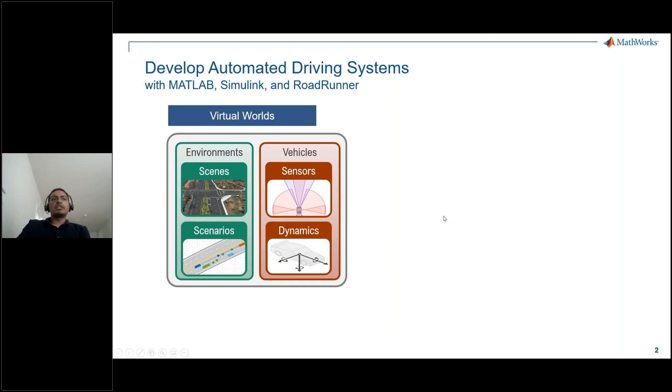The second trend driving MathWorks investments is the need for multidisciplinary skills. Developing an automated driving application requires a variety of skills, from planning and controls to perception disciplines like detection, localization, tracking, and sensor fusion. MathWorks provides dedicated toolboxes to help you learn and apply these disciplines, along with metrics and analysis capabilities you can use throughout your development process.

The third trend driving our investments is the need for software. Our investments here are focused on strengthening our platform tools to enable you to design, deploy, and test the embedded software. To illustrate how these different investments come together, let's take a look at some of the examples that we ship with each release.

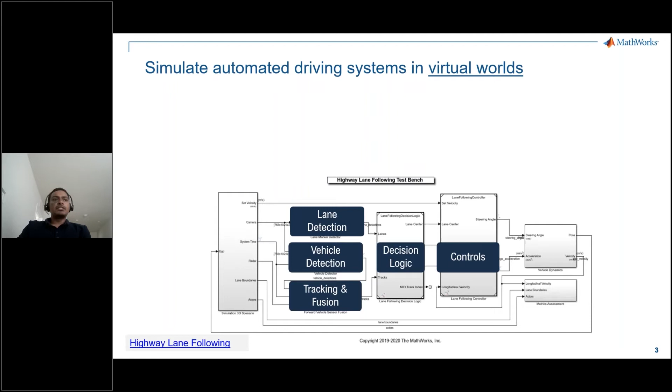Let's say you're developing a highway lane following application. You would have components for perception, tracking, decision, and controls. In order to design and test these systems, you will likely want a virtual environment that allows you to generate camera images, radar detections, and also model vehicle dynamics. After that, you would want to assess overall system performance.

This is an example that we have been shipping for a few releases. Each release we incrementally improve upon it. This example helps you learn how to architect and simulate at the system level.

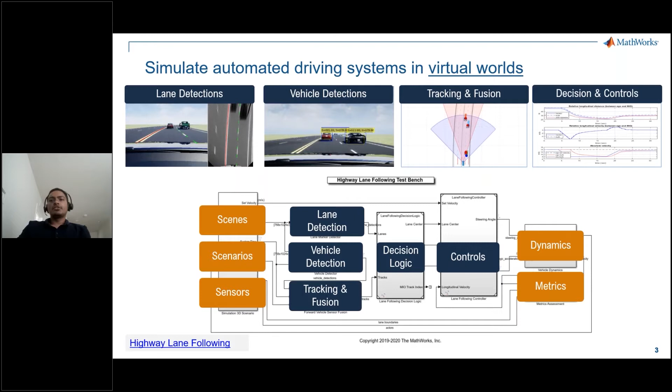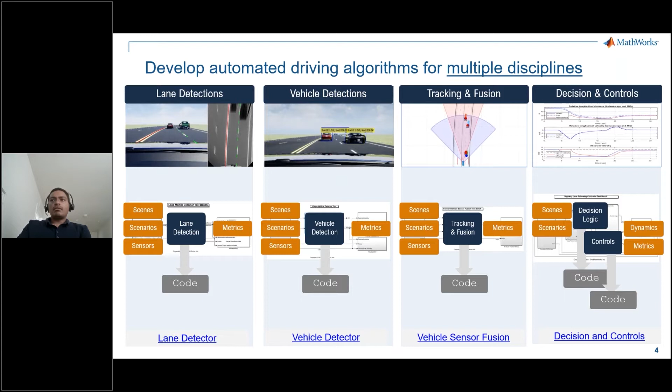Once you have code for this algorithm, whether you get the code from MathWorks or you coded it yourself, you can bring that code back into the system level simulation and gain confidence that the code is functionally correct at the system level. In addition to running interactive simulations, MathWorks provides tools that help you manage tests and report results. You can automate the testing at your desktop, on a cluster, or on the cloud.

You can also reproduce all the examples shown in this presentation, and we have customers that extend these examples or workflows further in their development process. You can bring generated code back into the system level simulation and gain confidence that the code is functionally correct at the system level. In addition to running interactive simulations, MathWorks provides tools that help you manage tests and report results, and you can automate the testing at your desktop.

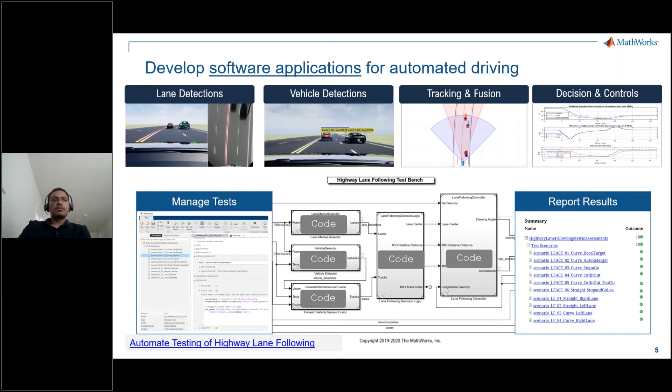One area where we see a lot of interest is in creating scenario variations. Once users learn how to create virtual scenarios, they start creating variations and use simulations to help them identify new scenarios of interest to add to their regression tests.

We also work with our customers to help them identify new scenarios from their recorded data. We help them extract information from their CAN log or directly from camera or LiDAR data. Extracting information directly from camera or LiDAR data often begins with a labeling process. From the recorded data and labeled data, we help them identify scenarios of interest and help them recreate simulations of the recorded data. They can then integrate those into their design and testing workflows as well.

The examples that I talked about demonstrate some ways that customers develop automated driving applications with tools from MathWorks.

Now that you have an understanding of how these tools can come together, we'll take a closer look at some of the newest features and examples that align with the areas of investment: virtual worlds, multidisciplinary skills, and software applications.

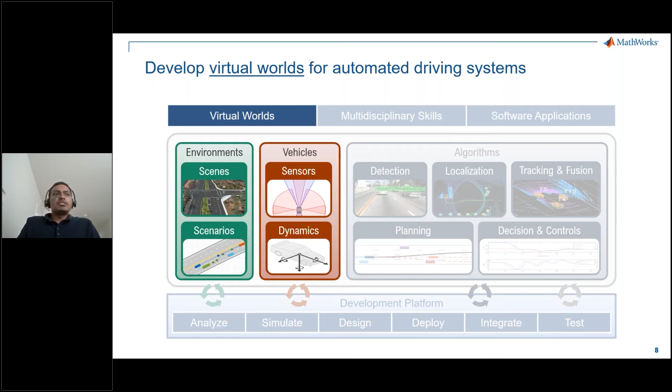Moving on to the next section here, I will cover MathWorks investments in the virtual world area. In this virtual world section, we'll cover scenes, scenarios, and different sensor modeling capabilities.

Last year, MathWorks introduced a tool called RoadRunner. RoadRunner is an editor for designing 3D static road networks that can be used in automated driving simulations. RoadRunner can import a variety of formats.

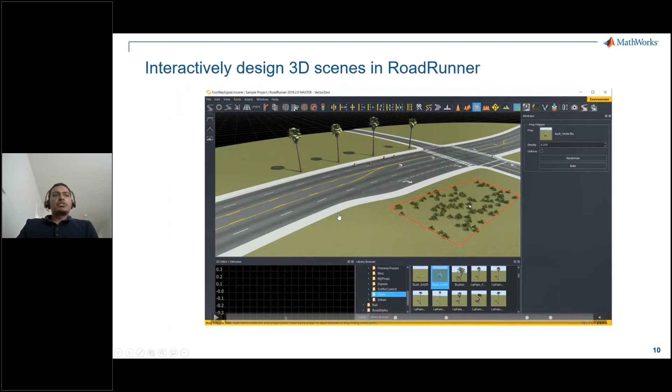If you haven't seen RoadRunner before, this will present some portions of the tool to show how it looks. As you can see in the video here, it's easy to edit roads and update the road lane characteristics.

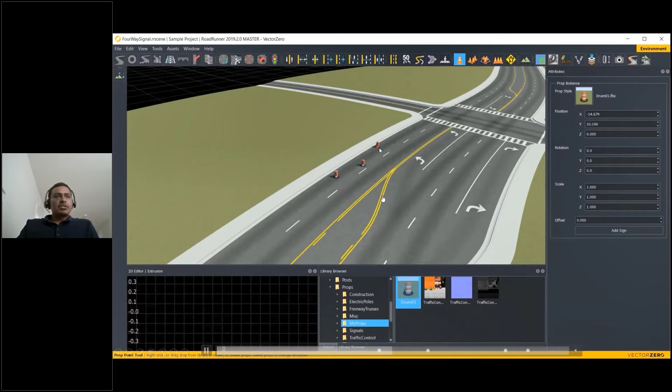You can also add roadside objects, like traffic drums, and you can add road signs. You can also add traffic lights, and simulate intersections as well. You can program the intersections accordingly.

Here I'm going to show the workflow of exporting the Roadrunner scene to Carla. First, to export it to Carla, you begin with a scene in Roadrunner, and then, as you see, I made a few changes here to edit the road.

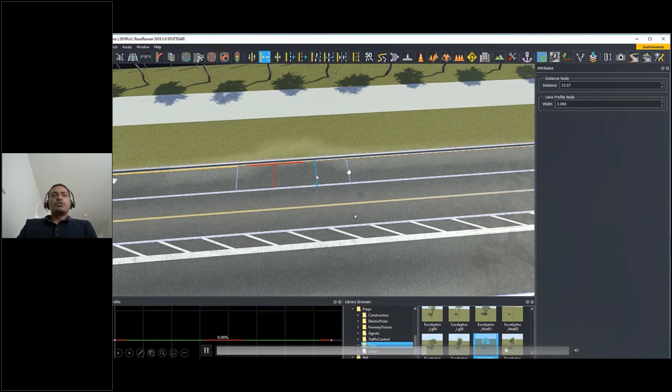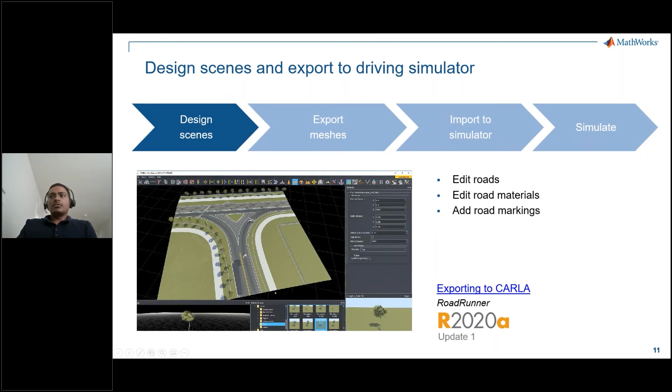I'm changing some road materials, and then also adding some road markings here. After that, you can export the mesh from Roadrunner and import it into Carla to simulate the same scene. Here you're seeing the exporting options. We are exporting into FBX format, and once you have exported, you can import that into Carla.

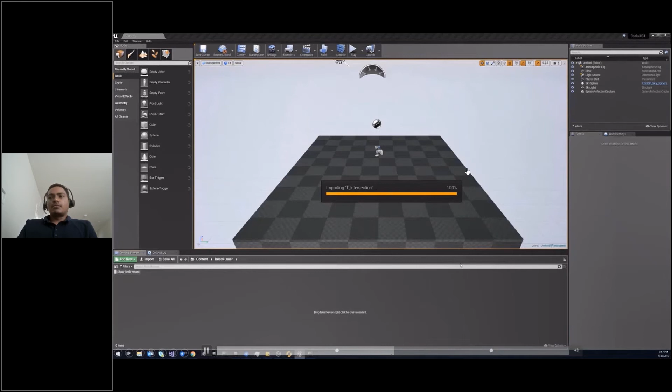As you can see, it's a very quick process to import the mesh into Carla, and once you import it into Carla, you can simulate the scene in Carla, as shown here.

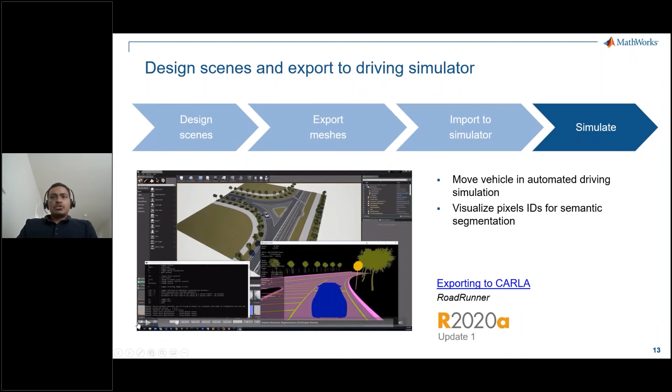Once you import the scene into the Carla simulator, if needed, you can visualize it for semantic segmentation. After that, you can also add required actors as shown here, and then simulate the scene as well as the actors in Carla.

In 20A, we provided an addition to Roadrunner called Roadrunner Asset Library, which is a set of 3D models and assets for scenes you want to create with Roadrunner. The library provides hundreds of assets, including road and highway signs, traffic signals, road surface markings, trees, barriers, and road damage textures such as cracks and oil spills.

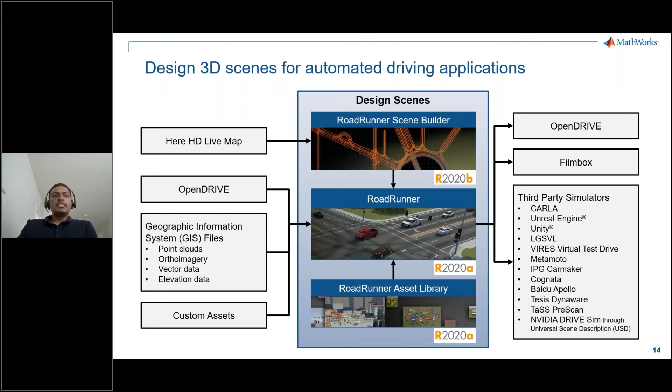The second addition in 20B is a scene builder, which imports and automatically synthesizes 3D road models from HERE HD Live Map road data. You can visualize and edit the road models in Roadrunner, adding trees, streets, road signs, and other elements to create 3D scenes and then export them to the simulator of your choice.

Here I wanted to highlight some of the new capabilities of the tool. The first is the cross-section tool, which enables you to edit the shape of the road at specified cross-sections to manipulate banking, crowning, and curb shapes. The next is the superelevation tool, which adjusts the slope and banking angle for the full width of the road.

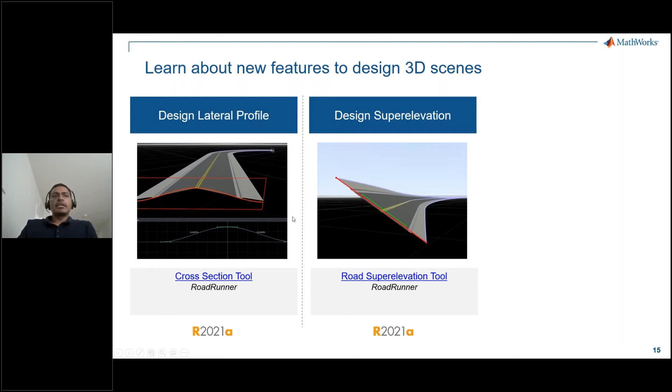While we had the ability to read HERE HD Live Map in 20B, in 21A we added import of additional information such as poles, barriers, and signs in the editing canvas.

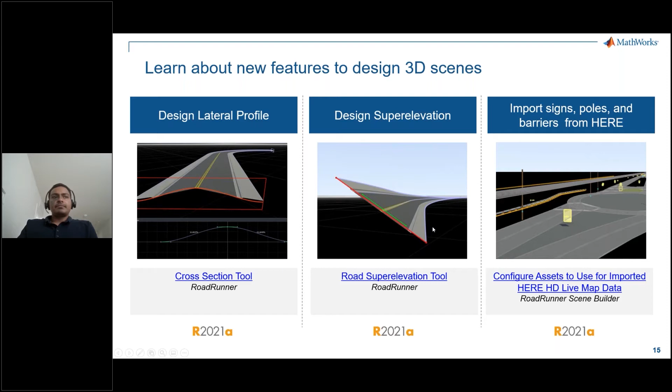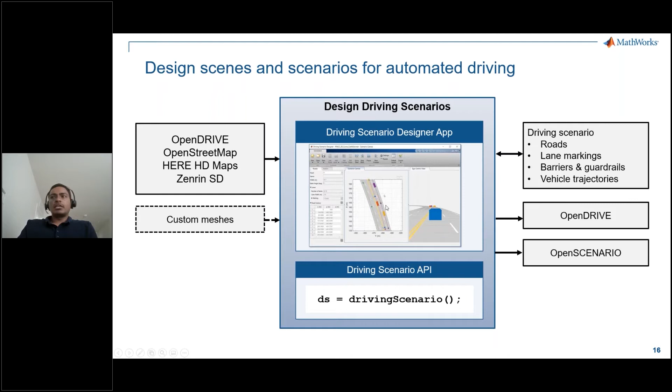RoadRunner was the newest addition to our portfolio, but since 2017, as part of the Automated Driving Toolbox, we provided tools to help you interactively and programmatically design scenes and scenarios in a cuboid environment. The image you're seeing is the cuboid environment.

I'll go into a bit more detail here. With a few instructions, you can create a scene - these are very quick steps you can do for the scenario. After that, you can add actors as well as the trajectory programmatically. Doing this programmatically gives you better control of creating and controlling the scene. Once you do that, you can simulate the scene very quickly.

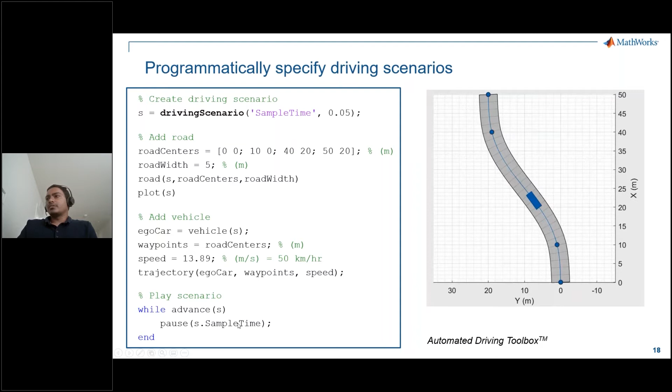As you can see, these lines of code are simulating the scene. Some of the newest features of this cuboid environment I'd like to highlight are adding guardrails or barriers, and you can also import OpenStreetMaps into this cuboid environment scenario designer. You can also import Zenrin maps, which are popular in Japan.

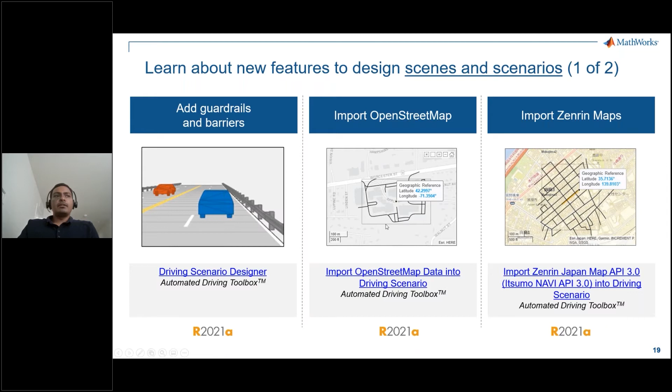In addition, you can now specify reverse motion and also export to OpenDRIVE, OpenSCENARIO from the ASAM standards. MathWorks is part of the ASAM organization, and we are investing in OpenDRIVE and OpenSCENARIO standards. We currently have some capabilities, and we continue to invest more in these areas.

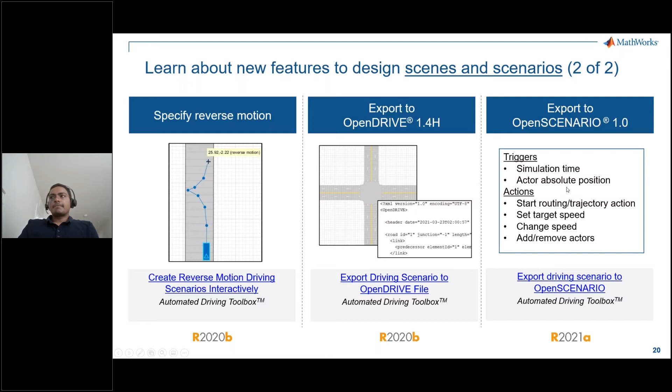So far, I talked about authoring scenes using RoadRunner, and also how the driving scenario designer in ADT can be used to create scenes in a cuboid world. The simulation with the cuboid world is very useful if you're developing controls, planning, tracking, and fusion. Developing detection and localization often requires a 3D environment. We integrate with Unreal Engine to support these workflows as well.

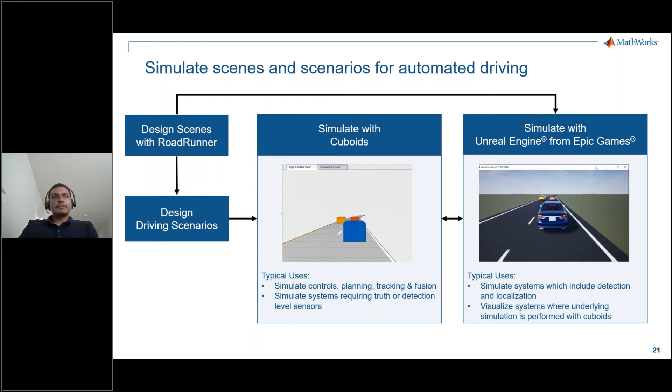Some enhancements to developing with Unreal Engine include making it easier to integrate custom vehicle meshes - you can import your own vehicle mesh and work with it. You can also control the vehicle headlights and tail lights, and control the weather and sun placement in these simulations. In the next slides, I'll show some of these in more detail.

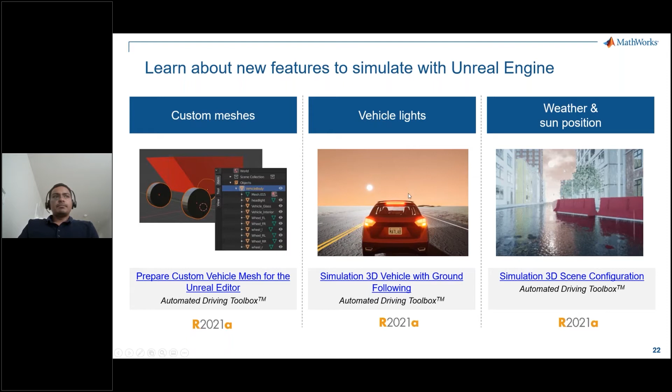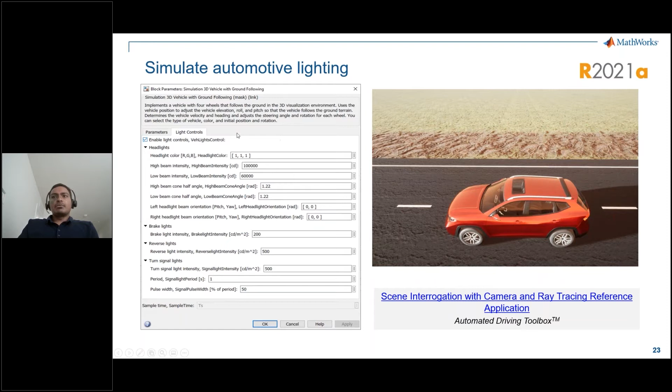Here I'm going into a bit more detail on how you can control the lighting. You can see there are a lot of parameters supported, which you can tune to simulate lighting control of the vehicle. You're able to control different lights of the vehicle with specific timing control and do simulation with those lights.

This reminds me of a scenario I used to be involved in - for some applications we used to develop, we'd go to different places to look for rain and move people there to test. Whereas with simulation, you can do all that at your desk.

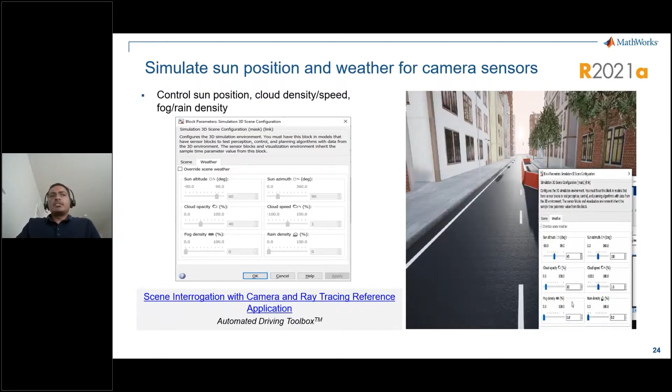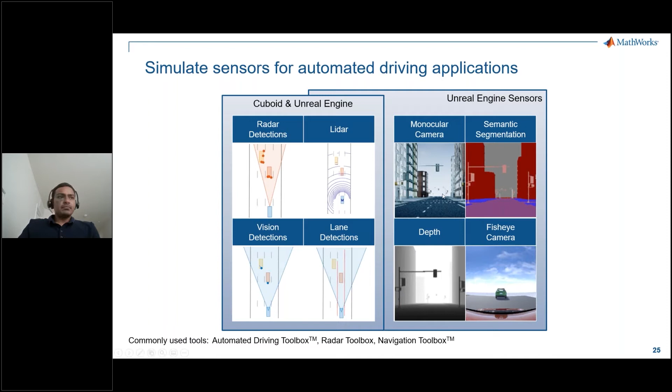And some of the sensors like radar track signals and IQ signals work in only cuboid world. The sensors that I talked about so far are to help detect objects, but there are also other sensors that detect the position, such as wheel encoder, GPS, IMU, and INS. These can be used in both worlds since they detect position.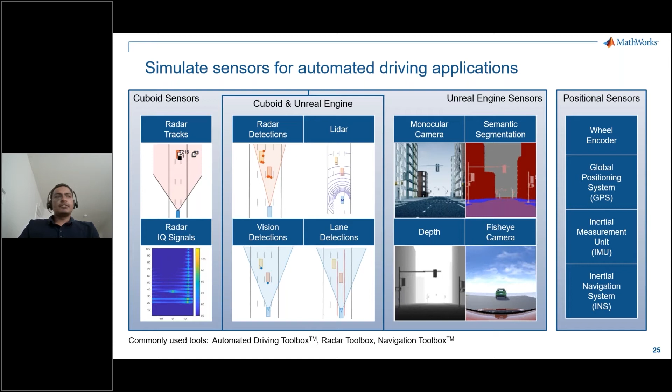Radar is one of the sensors we have been investing in, and in 21a, we have a new toolbox called Radar Toolbox. The philosophy of investments in radar is guided by the different fidelities that are needed at different stages of development. For example, at the application level, engineers want to work with detections, clusters, and tracks. But if engineers were working on radar sensors, they want to look at the raw IQ signals. So we have environments and an easy way to switch between these two types of outputs here.

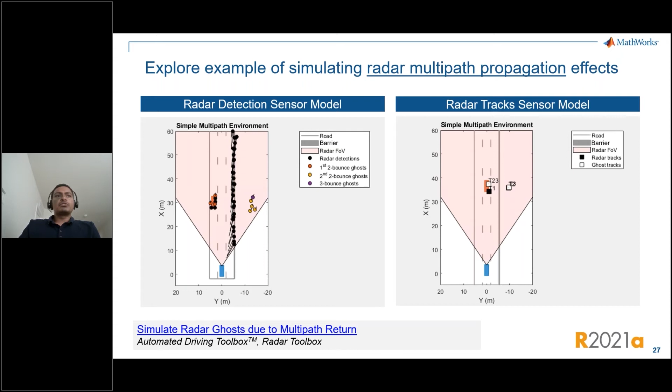To illustrate multipath propagation effects, we can explore a shipping example which demonstrates ghost detections at both the detection level and at the track level. Statistical radar models are used to generate detections or tracks in single and multi-bounce simulations. You can also generate time domain IQ signals using the radar transceiver System object.

We see here that the ghost target appears at a larger range than the real target, and eventually they both converge to the real target. As you can see here, there are ghost targets and then the real target converging together and becoming a real target.

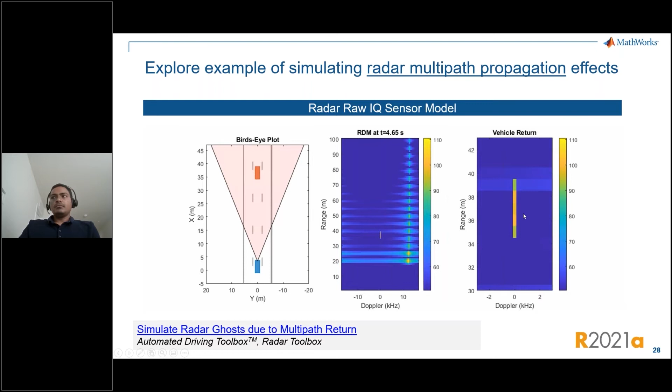Then there are libraries available. Sorry, I think I skipped one slide here.

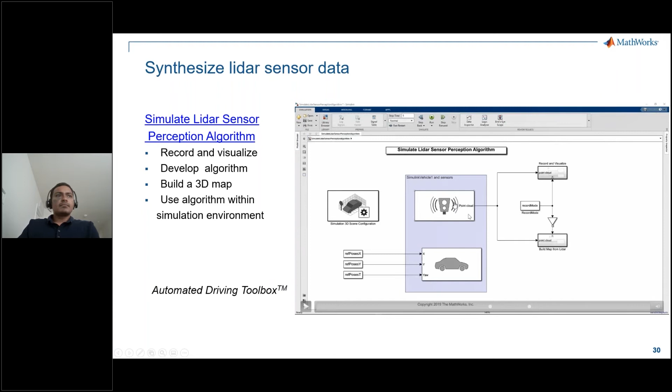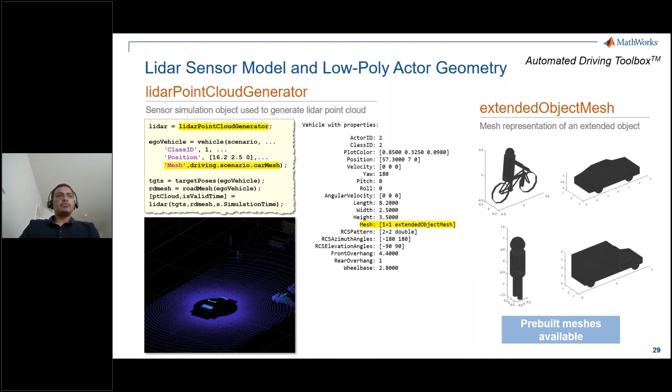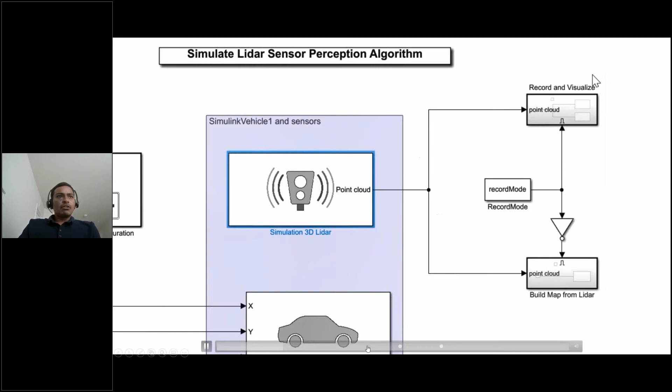There are libraries available to generate point clouds from a driving scenario. Using extended object meshes, you can simulate LiDAR sensor data for custom meshes, and there are pre-built meshes available also. The example here shows how to record synthetic LiDAR sensor data using a 3D simulation environment. Using that, you can develop a perception algorithm using the recorded data, and after that, you can use the algorithm within the simulation environment.

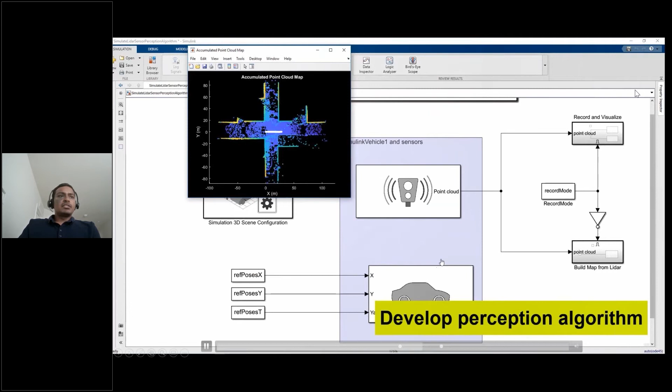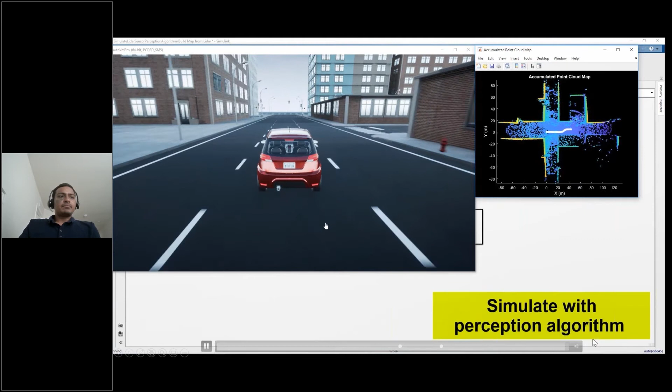After that, the model records and visualizes the synthetic LiDAR data. You can use a pcplayer object to visualize the streaming point clouds. Once the model has completed simulation, you can save the data to the workspace as a point cloud object. Next, you can use recorded data to develop a perception algorithm to build a 3D map of the environment. After that, we can test the perception algorithm using stress-tested scenarios. This approach can be used to increase coverage for scenarios that are difficult to reproduce in the real world.

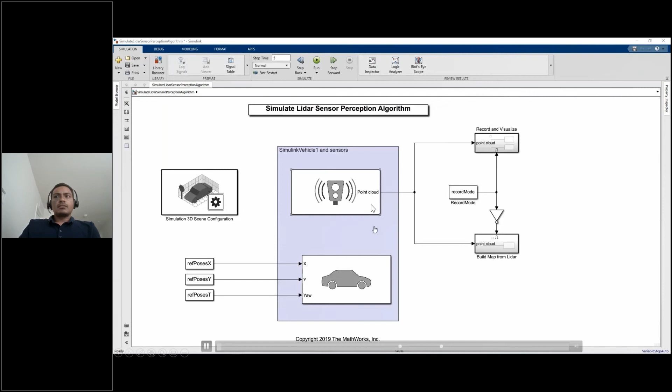There is some problem with clicking here.

The camera sensor is based on the ideal pinhole camera model with a lens added to represent a full camera model, including lens distortion. For the camera sensor, you can specify the camera's mounting position and orientation. You have an option to choose between different mounting locations. You can also define sensor parameters such as camera intrinsics based on a pinhole camera model. And also the model includes radial and tangential lens distortion. And you can estimate camera intrinsics, extrinsics, and lens distortion parameters using the Camera Calibrator app from Computer Vision Toolbox.

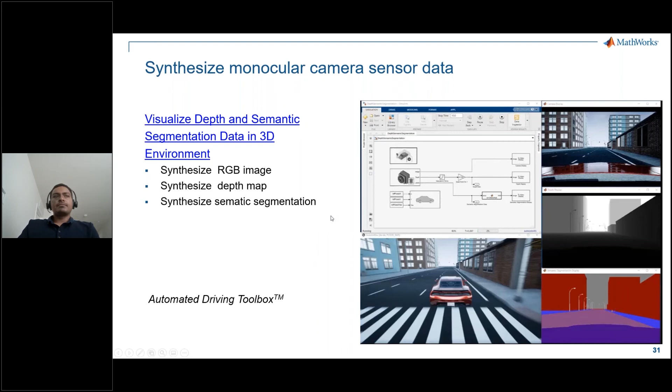We also have vehicle dynamics models for 2-axle, 3-axle vehicles, and also trailers. If this is an area of interest to you, we can have a follow-up session with experts in this area.

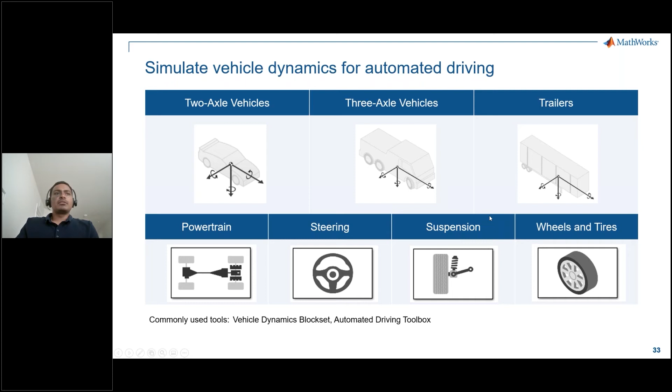So far, we have laid the foundation of MathWorks solutions to develop virtual worlds, but what we see in the field is also how customers extend these workflows to develop new scenarios. This happens in two ways. The first method is to create new scenarios from recorded data, where customers use the recorded data, label it, extract the information, and then create scenarios out of all that analysis. In the second method, they create new scenarios programmatically, introducing variations into the existing scenarios. In both areas, MathWorks continues to invest to give our customers more possibilities to identify new scenarios to test.

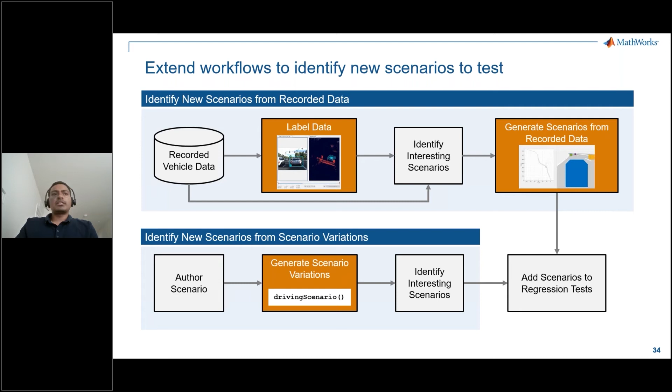In the previous slides, I talked about simulating different sensors. Now let's take a look at labeling sensor data. We have a Ground Truth Labeler app, which allows you to bring in camera, LiDAR, and custom data. Its primary interface is a graphical interactive tool that allows you to specify regions of interest, such as cuboids, rectangles, polygons, and also sub-labels and so on.

One of the big powers of this tool is to register automation algorithms. While we provide some algorithms to get you started, we often support customers to use algorithms they have developed or use state-of-the-art algorithms that are available publicly. If you have your own algorithm, you can import that algorithm and then label the scene the way you are expecting to.

And here I would like to highlight some more recent enhancements for labeling. This is allowing labeling polygon regions of interest, and then also you can label projected cuboids and be able to synchronize. And also you can automate the labeling process with both camera and LiDAR. Basically, we are seeing very often customers wanted to use both camera and LiDAR data for ground truth labeling.

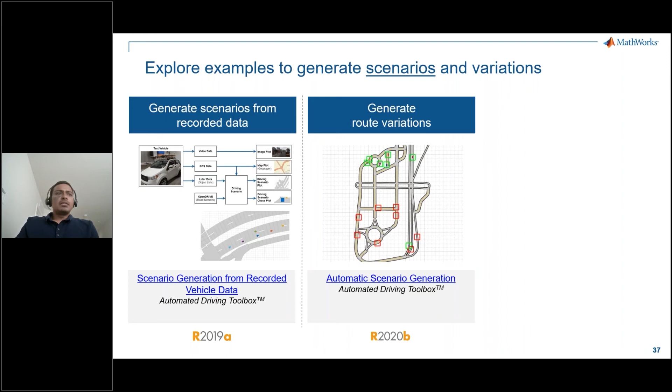Once we have the information, we often see customers programmatically varying the scenarios to generate variations out of those scenarios. Here, one example I would like to call upon is scenario generation from recorded data in 19a, which uses detection lists and GPS data to recreate the scenario in simulation. In 20b, we added an example for generating route variations.

And we have an example to show how Simulink can be used to program multiple vehicle behaviors existing in the same simulation. Here you can see there are different vehicle behaviors. You can configure your intelligent vehicle like velocity keeping, lane following, and lane change.

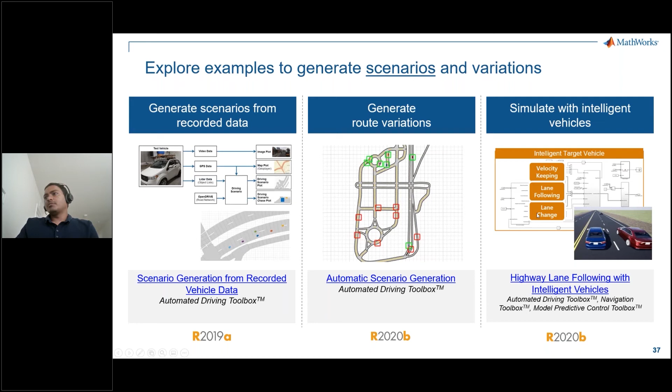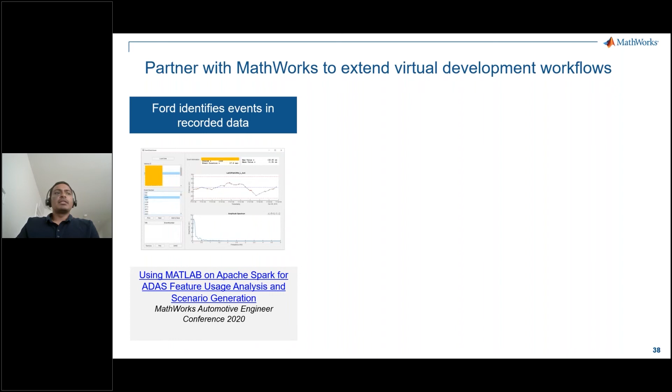So here we set up the multiple different tools and areas of investment in the areas of virtual worlds. This is also an area where we encourage our customers to reach out to us and work with us for their specific use cases. For example, we worked with Ford to identify important events from their logs of data. We also helped BMW in order to label vehicles and extract information from their images.

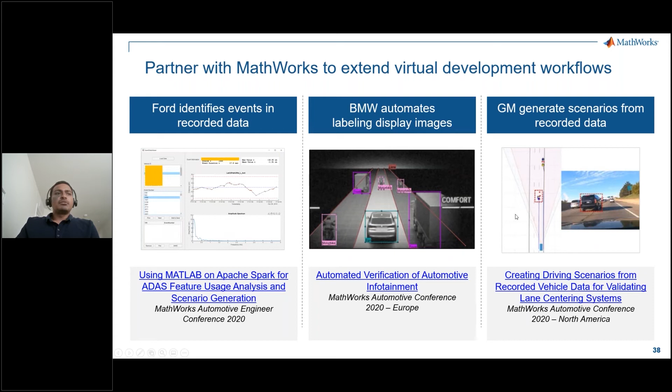And one more thing I would like to highlight is working with GM, we facilitated recreating scenarios from recorded data and bringing that into simulation in order to test their lane centering algorithms. So this is the end of the section of virtual worlds.

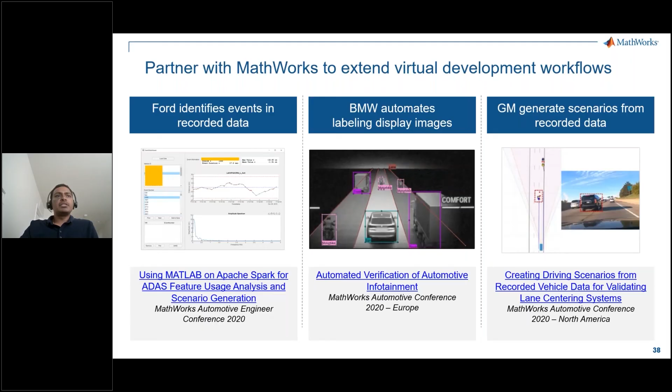Moving on here, in the previous section, I talked about how the virtual world is going to help engineers develop automated driving applications. When we look at all these virtual worlds, we realize the need for a lot of algorithms underneath the applications to address the challenges or to develop the needed features. Basically, it requires a lot of skills across multiple disciplines in order to design such algorithms, both from functional correctness as well as the deployment standpoint.

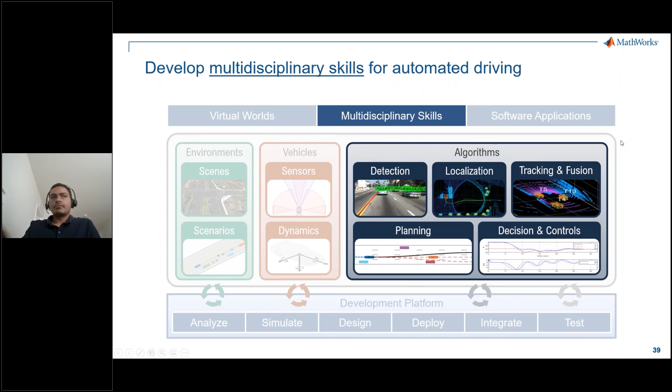In this section, I'm going to walk through some of these disciplines and tools to design these types of algorithms that MathWorks provides to help engineers learn and apply them. Here, first, I'm going to focus on planning and controls as we have lengthy investments in these. Along the lines of planning and controls, we see customers adopting our tools for various levels of automation, autonomy, and automated driving, ranging from ADAS features like adaptive cruise control, emergency braking, to higher level functions like lane change and parking.

Here, I wanted to highlight some of the areas we are actively investing in. One of them is the highway lane change application under planning and controls. This is an example that shipped a couple of releases back, and we continue to improve it. Some of the things we are improving are the visualization, such that you can see what's happening in the simulation and possible trajectories the vehicles may choose. The example shown here also focuses on the underlying architecture of how to build such kind of application.

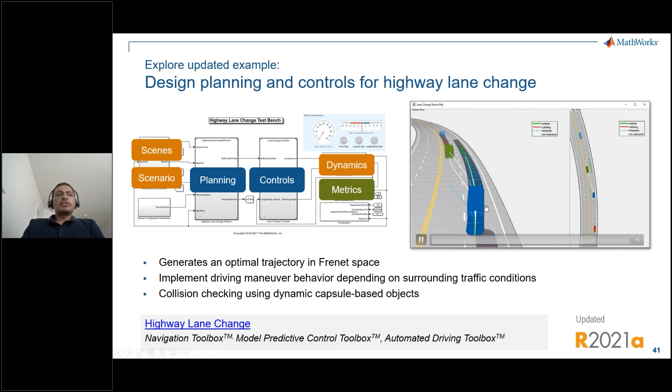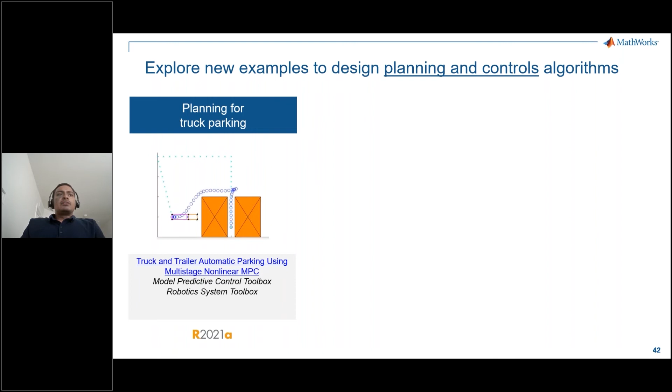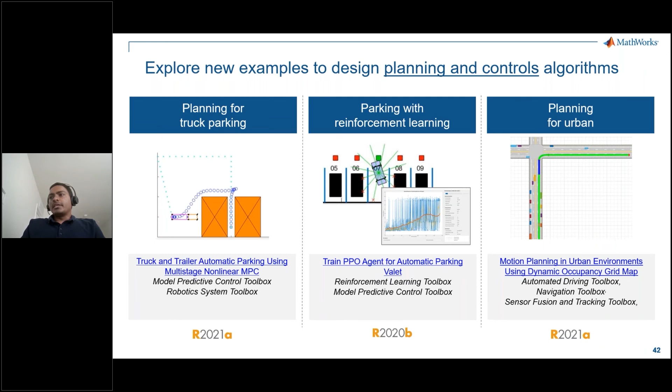We have been investing in examples to help you design planning for truck applications, design a variety of applications using reinforcement learning, including parking, as well as more advanced techniques for planning in urban environments using occupancy grids. MathWorks has been investing in tools to help design tracking and fusion algorithms in a variety of different applications and various sensors with different data types ranging from detections and tracks to occupancy grids.

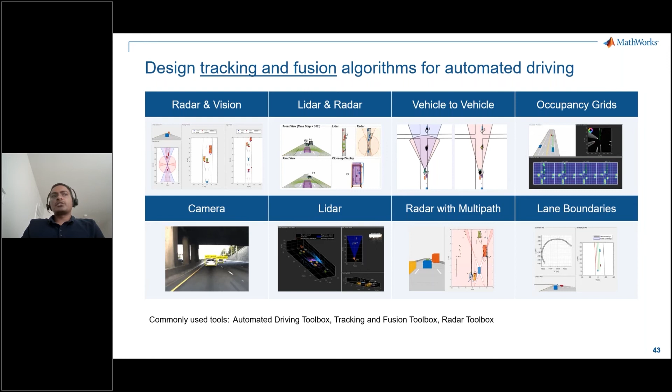One of the new examples that I would like to highlight leverages the radar sensor model that I mentioned in the previous section. This example presents how you can build a tracker which filters ghost detections from guardrails or other vehicles. In addition to visualization of the results, you can also apply metrics to both the classification and tracker, as you can see here.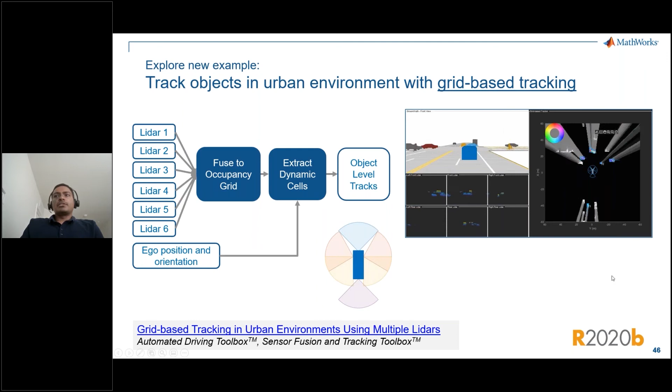I talked about LiDAR feeding into occupancy grids. LiDAR, radar, and camera are the common sensors that we see customers use to detect and classify environments around the host vehicle. MathWorks has been providing Computer Vision Toolbox for a while, which has been helping engineers develop computer vision algorithms that take images as inputs. Next, I would like to focus on LiDAR Toolbox in 21a. We recently updated LiDAR Toolbox, which was originally introduced in 20b.

Part of the LiDAR Toolbox focus is to help you design detection algorithms. Some examples we provide are detection for lanes, applying semantic segmentation, and applying PointPillars. These are the detection algorithms that would feed into sensor fusion, which feeds into planning and controls. Our latest investments have been in tools to develop localization algorithms. SLAM is gaining popularity over the last few releases, so we have added examples for mono, stereo, and LiDAR SLAM.

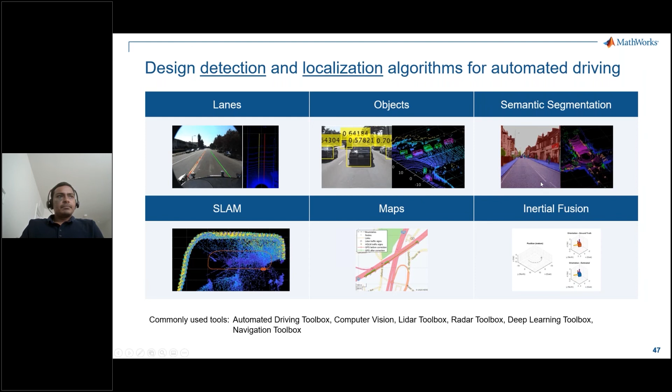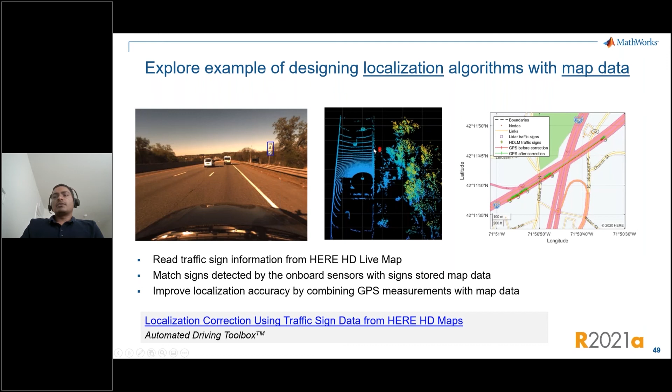In all the previous examples, we are assuming localization, or at least part of the localization information, is known for planning and tracking. The localization module is an essential module for autonomous driving. More specifically, for SLAM, engineers could design and test vision SLAM and LiDAR SLAM using real data or simulated data. Last year, we worked with one customer who used ORB-SLAM, a type of vision SLAM. We used RoadRunner to create the scenes, then converted that scene to Unreal Engine to prepare for simulation. On top of that, we added fisheye camera calibration models.

RoadRunner is capable of adding different types of features and textures to the scene, and the fisheye camera is calibrated correctly. The algorithm reacted very similarly for simulated sensor data versus real camera data. So that comes to the end of the multidisciplinary skills section, and it's time for the last poll question, number 4.

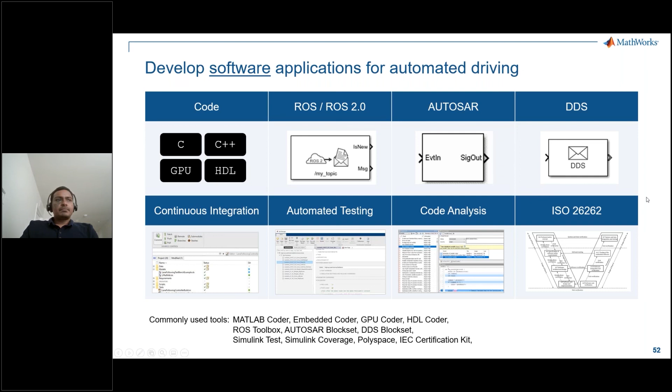First, I would like to call out something in 21A: how we have integrated the vision detector into Simulink and generate C++ or GPU code. GPU code generation is performed from Simulink. This is a nice example which allows you to collect metrics on how the vision detector is doing, but also, through software in the loop, we can measure execution time and make performance improvements across different variants of the code generation. As you can see, the different variants of the code generation here have metrics.

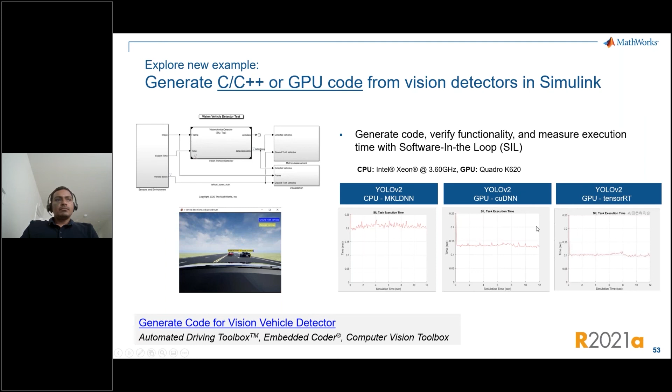In addition to generating code for vehicle detections, we also provide new examples to help you learn how to generate code for lane detection, controls, and planning algorithms. In each of these examples, you can also learn how to run software-in-the-loop simulation and review code metrics like coverage and execution time.

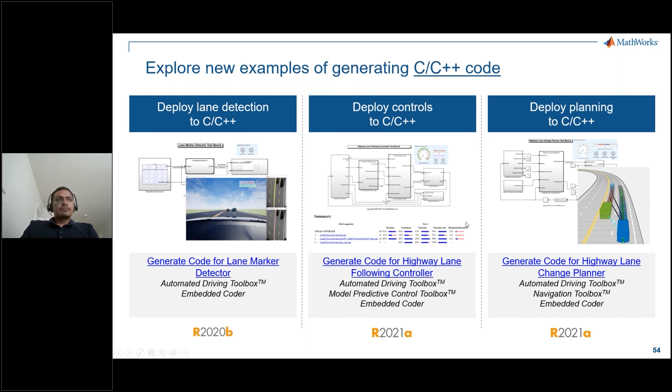In the previous example, we focused on algorithm code. Often we see the need to integrate those algorithms into service-oriented architectures like ROS 2.0. This example here shows how to generate ROS nodes in the context of a parking valet application.

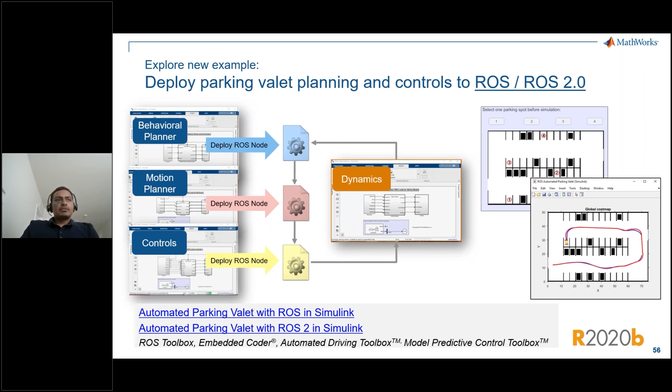The last example that I would like to highlight is ISO 26262. Engineers have been using MathWorks tools for ISO 26262 development of decisions and controls for a long time. One of the things we heard from customers is that they would like to see an example which would walk them through how to apply it in the development of automated driving applications.

This is our first revision of the IEC certificate for ISO 26262. If you are working on safety-critical applications or standards like ISO 26262, this example could help you get started. We also have additional capabilities and services available to offer in order to make you successful in this area.

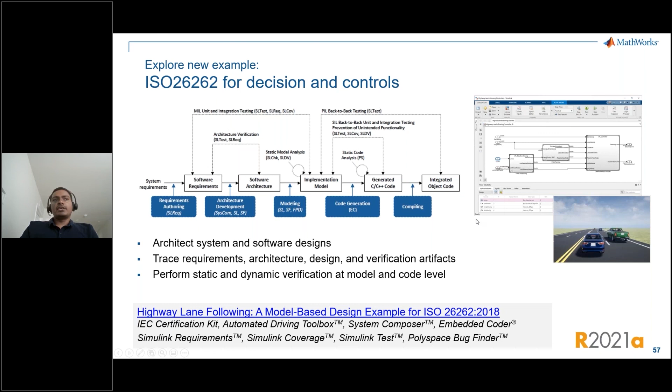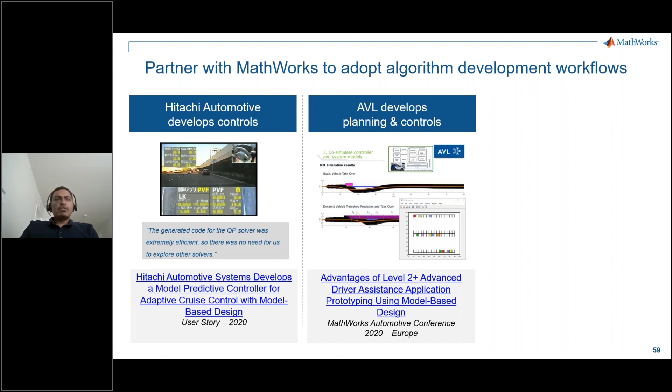Up until now, I talked about different tools for developing algorithms and techniques for code generation. Here we can see how our customers are using our tools. This is an example of Hitachi developing their adaptive cruise control system, and they are happy with the quality of the generated code. Another example is from last year's MathWorks Automotive Conference, presented by AVL. AVL used Simulink to design controls and a planner for highway lane change. Mando also presented something similar at the MAC.

One more user story I would like to mention is Electrobit, where they developed a driver monitoring system using adaptive AUTOSAR. They commented that their development time got reduced from a year to 3 months in this case. MathWorks can partner with you in your development if you are into these kinds of use cases and need support in this space for prototyping or for deployment purposes.